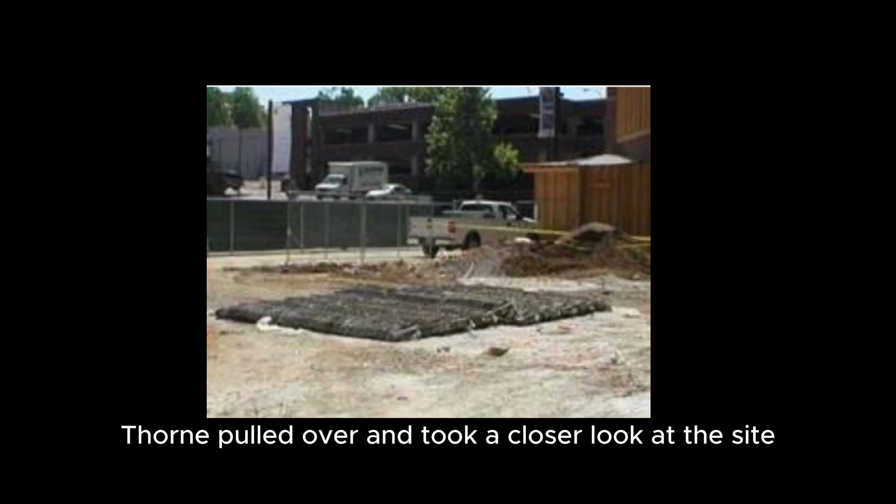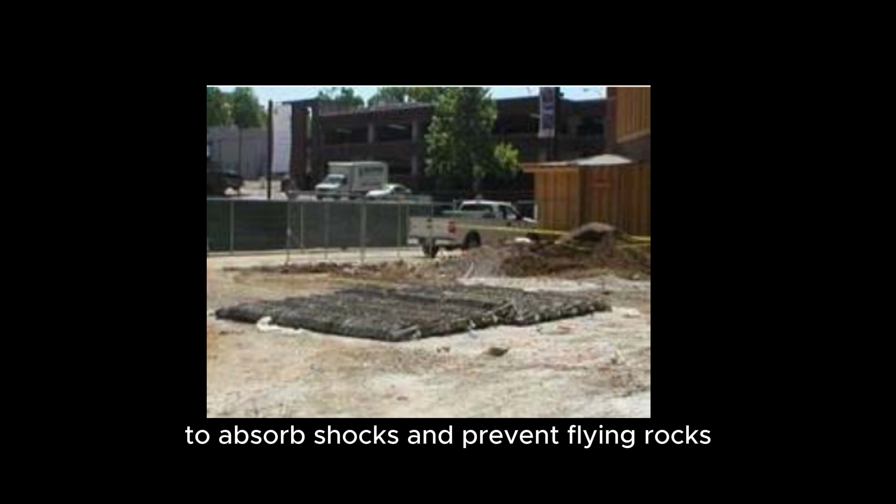Thorne was a 25-year-old mechanical engineer with a passion for science and technology. She had a solid understanding of the risks associated with utility installations, particularly on residential streets. In her position as assistant engineer for the Nelson region, Thorne was responsible for advising on gas line construction and maintenance and forming teams that supported the preparation of engineering drawings and designs.

She was well aware of the importance of collaboration with other utilities when planning the underground installation of gas lines in order to help manage safety risks. Typically, the collaborating teams would alert each other of any intention to dig for a construction project and follow up with corresponding utility markings on the roads or grounds in question. The markings were red for electrical power lines, yellow for gas, and blue for water.

Thorne was unaware of any request related to the construction site by the water utility. In fact, she was unaware of any recent communication for work in this neighborhood that fell within her assigned region. The foreman informed her that his construction company was planning to blast for a water utility installation in the notoriously rocky area. He noted that using a traditional backhoe or trencher was not an option in this case.

As the remaining construction crew members joined the conversation, Thorne explained that the site was far too close to the gas pipeline. She then asked in her professional capacity for them to stop the project because they could not proceed with the proposed blasting. She cited the potential risk to public safety as her reason to temporarily shut down the project pending further investigation. Her decision was greeted with resistance from the construction crew members, who stared at her with bewilderment before strongly objecting to her reasoning.

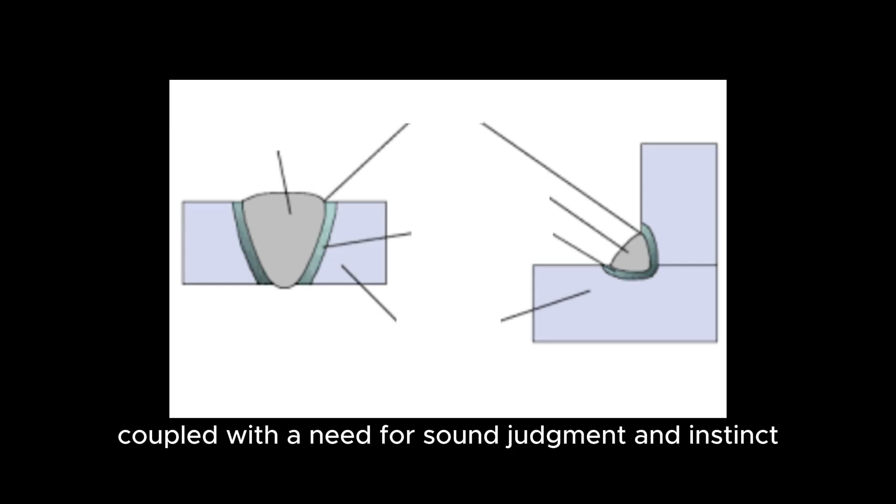There was no time for doubt or hesitation to weigh the pros and cons of her decisions because people's lives could be at risk. In addition, her own personal and professional reputation was at risk. The incident had propelled her into the rapid application of limited theory, coupled with a need for sound judgment and instinct. Thorne was responsible for safety on field projects.

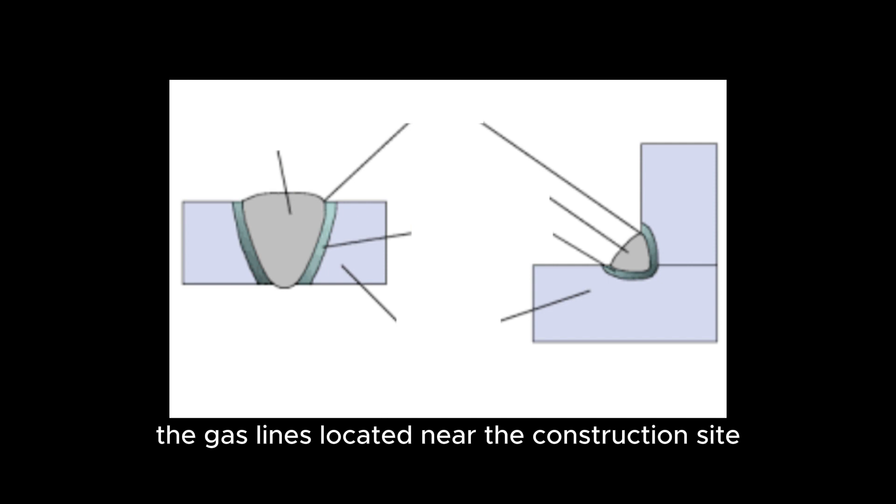Therefore, upon her arrival at the office, she promptly dispatched an X-ray crew to conduct a review of the quality of the butt welds on the gas lines located near the construction site to assess their compliance with safety standards. She wanted to validate her actions by taking a fact-based decision-making approach.

Therefore, she asked for an investigation of the status of the V-notches using X-ray technology to assess any potential flaws incurred from age and the ability of the butt welds to withstand an impact. Her aim was to assess if the pipe welds met all appropriate standards and were solid penetrating welds.

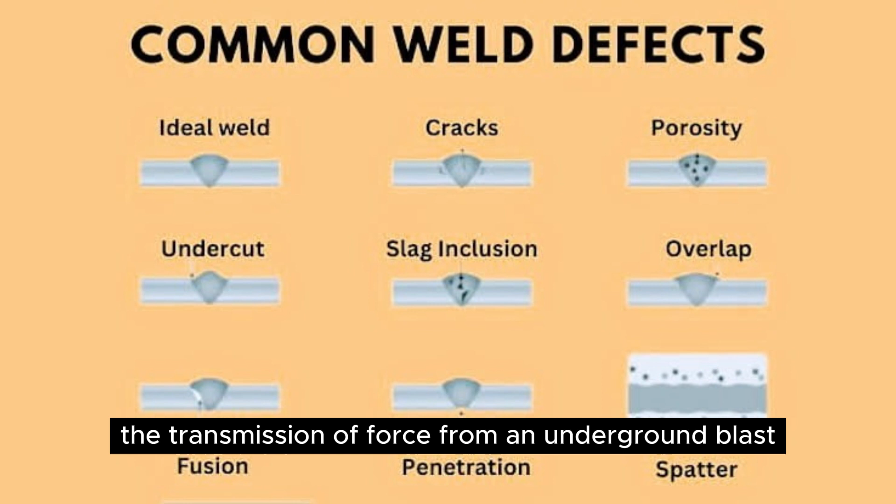Weak non-penetrating welds could be prone to leaks, especially after the transmission of force from an underground blast. Leaks could follow rock and end up in unintended places, such as residential basements, in this instance. After ordering an investigation, Thorne sought the counsel of a senior colleague, the construction and maintenance manager.

Her colleague, a man in his 60s, was responsible for field crews. In fact, he was responsible for the crew who had laid down the pipe on the street in question 16 years earlier. The construction and maintenance manager supported Thorne's decision. However, a subsequent discussion with the senior technical team in the division was pending.

That meeting would also likely include a complaint from the construction crew, who had openly and aggressively challenged her decision to shut down the project against their wishes. Thorne wondered whether, in hindsight, she should have done anything differently. Q1. What's the problem? What has been observed?

How significant? A1. Thorne was a 25-year-old mechanical engineer with a solid understanding of the risks associated with utility installations, particularly on residential streets. When she happened to drive by a construction site by a water utility along the Pollen River, she pulled over and asked the construction team to stop their blast project for reasons of public safety.

The employees, all men older than her, used her age and gender to challenge her authority and decision. Thanks to her confidence in herself and her abilities, she held her ground and the employees resigned themselves to accepting Thorne's decision. Q2. What were the root causes that led to the problem? Central cause. The construction site was far too close to the gas pipeline. The proposed blasting could pose a potential risk to public safety.